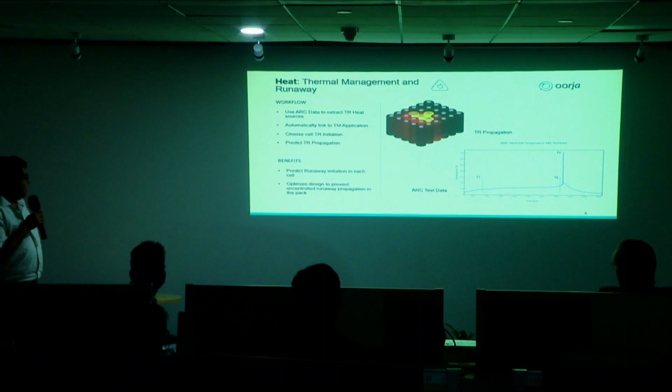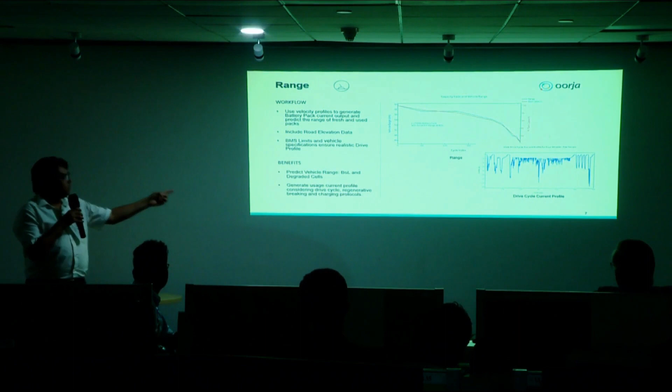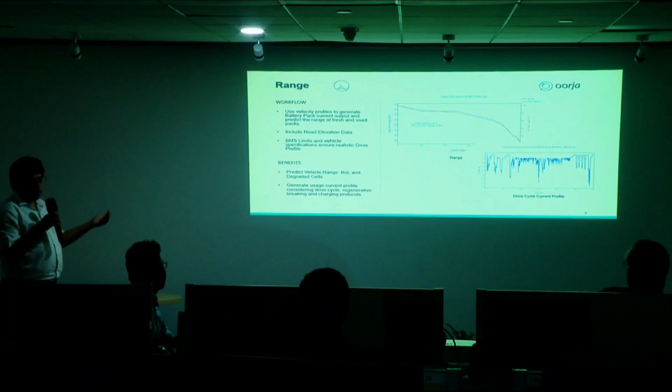And this is an example of a range prediction where you can provide this kind of a drive profile, and you can see how the vehicle range at different levels of degradation gets affected. Because when you have a new pack, your driving range is much larger than you would expect after it has degraded. And we can also predict, as the battery pack degrades, how the range is going to change over the period of time.

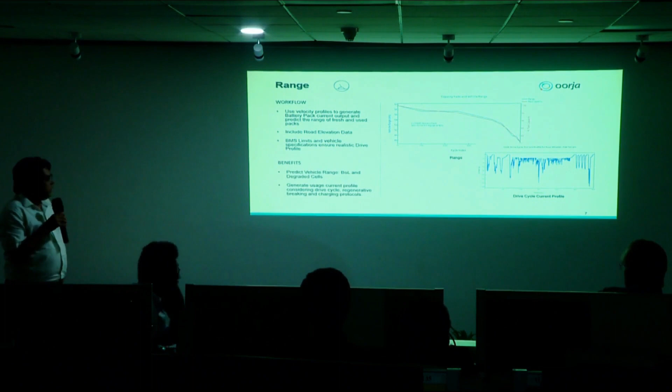So we operate with three different kinds of licensing models: starter, accelerator, and cruise control. With the starter, you can do basic thermal management and degradation predictions, but with the accelerator, you can import your designs, generate the drive cycles for further analysis, and you also get the data cleaning applications. And with the cruise control, you also can perform the runaway analysis.

And more about the founders: I come from a physics simulation background, where I have been doing these simulations and developing the software for a company called COMSOL Multiphysics, where I was working in the area of structural mechanics and rotor dynamics, where we developed 3 products out of the India office. Vineet, our other co-founder, was heading the Indian operation of COMSOL Multiphysics. And Prajakta was into user satisfaction at COMSOL Multiphysics. And that is where we all three realized that we need to change things for the designers.

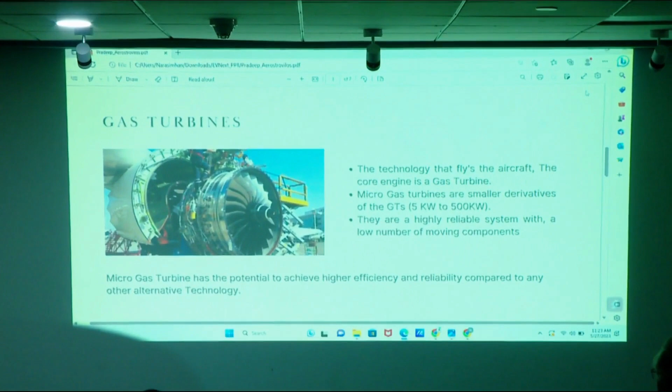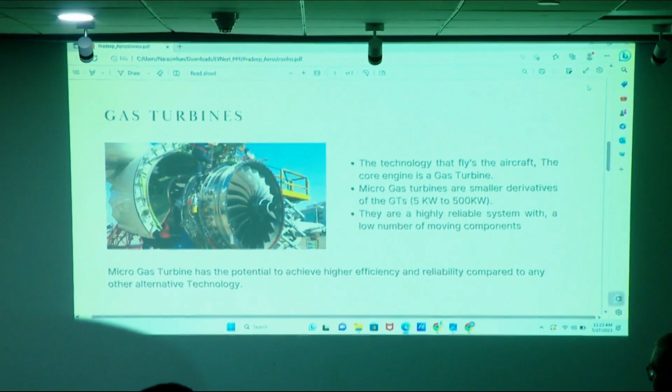Before going into what a micro gas turbine is, I would like to touch upon what gas turbines are all about. Gas turbines are basically engines that you see on your aircraft. They've been well proven, working for many decades, transporting millions of people. That technology comes with a lot of reliability and traditionally with a lot of cost also. What we are trying to do is take the base principle, work on a very simple structure and make it affordable across all platforms. That is the major work that we are doing.

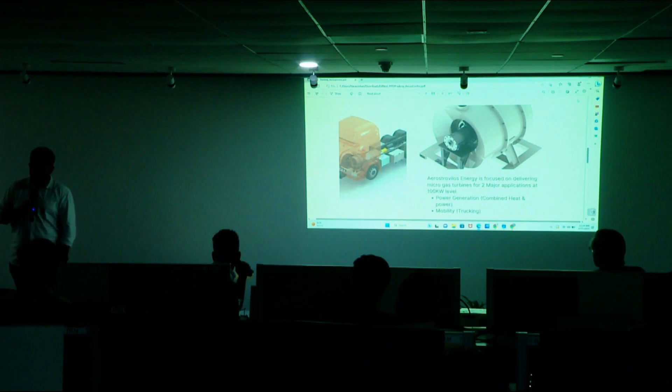So, like I said, what we are focusing on is a 100 kilowatt gas turbine engine. Two applications, one is trucking and then power generation. This will be the first product that we'll be aiming for, and then moving on, we would be looking at higher power levels. One of the major aspects of a micro gas turbine is it's also extremely modular. I can have 3, 4, 5 running and generate close to even 1 megawatt. So with the same capacity, I don't need to innovate newer products, rather build on modular levels. I don't have a pointer.

So the main focus here was to see how we can use micro gas turbines to build the mobility segment. What we propose is more of a hybrid system, and we have a couple of reasons why we are moving into hybrid systems rather than battery electric vehicle systems. One is commercial vehicles earn their revenues through carrying tonnage, weight or volume. That gets affected quite significantly when it comes to batteries. So we propose a very lightweight, compact system, our gas turbine engine, which generates onboard power. There is going to be a small amount of battery.

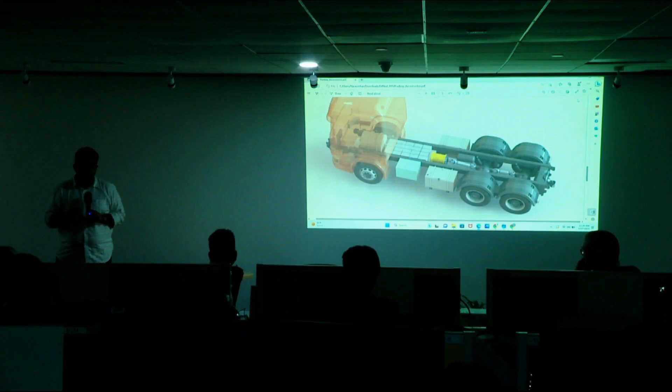So if you can see here, this is where the micro gas turbine sits. This is a small buffer battery, say about 20-30 kilowatts. And here you can see two boxes, which are fuel tanks, and the main motor that sits in the center. The yellow thing is the motor. What we do is ensure that there's enough power on the truck and enough range, and still take advantage of the electric powertrain where the efficiency is extremely high. So this overall configuration can give better efficiency.

It can be at par with grid level costs, plus heavily reduced capex because you're not using a huge battery. And the added advantage is you don't need megawatt-level chargers for fast charging, whereas the onboard system takes care of all the power requirements. Since you're not idling anywhere because your electric motor is taking care of all your movement, the micro gas turbine calculates how much energy is required and then starts and stops accordingly. So the micro gas turbine concept is laid out that way.

But as a company, we have also come up with a couple of innovations. Like I said, traditionally gas turbine engines have been very expensive because they use exotic materials. Our design allows us to use what is called turbocharger material. Turbochargers have been in automotive diesel engines for ages. Now even petrol engines have turbochargers. So we use the manufacturing and the materials from the turbocharger product. So our turbines will be as competitive as any diesel engines coming into the market.